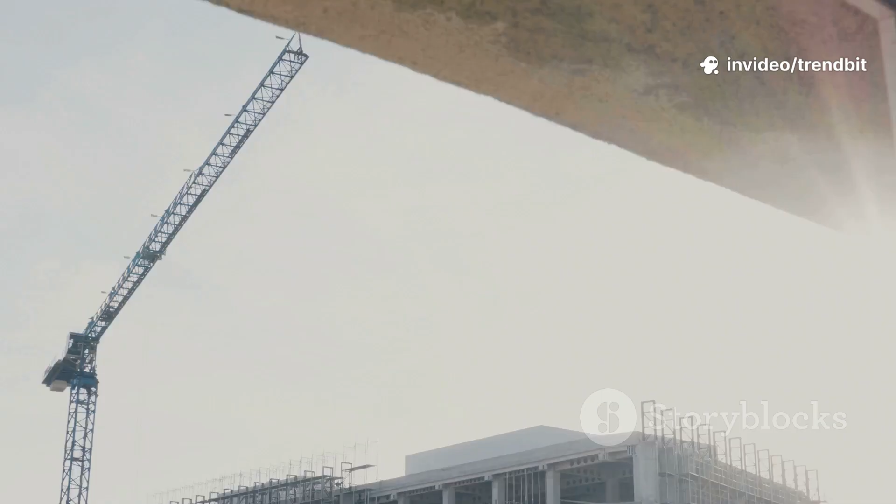The design was tested and approved, and construction went ahead. The building was completed in 1977, a proud addition to the Manhattan skyline. For a year, it stood without incident. Nobody knew that a simple change made during construction had turned its unique strength into a critical vulnerability, waiting for the right kind of wind to reveal its deadly secret.

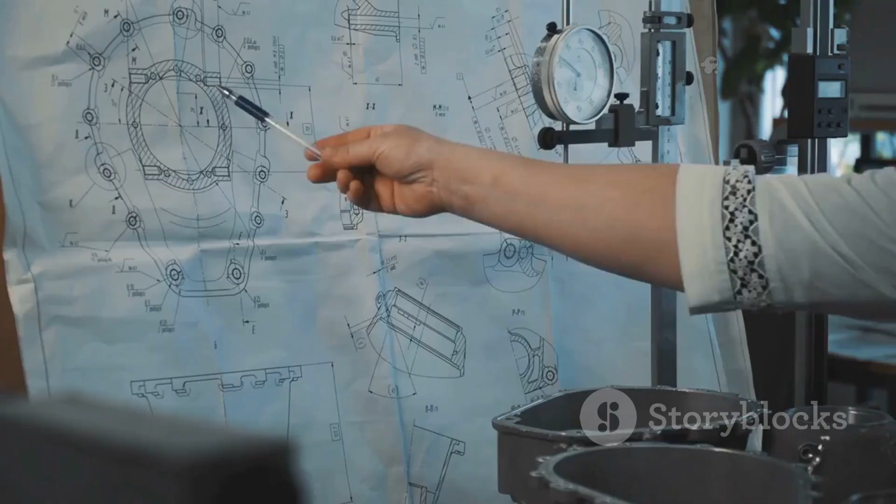This is a tale that reminds us that engineering is a human activity. Humans make mistakes. But what happens after a mistake is discovered is what truly matters. In this case, the chief structural engineer, a man named William LeMessurier, found the error himself. He was the one who designed the support system. He was the one who had to face the terrifying reality of his own miscalculation.

The weight of this knowledge must have been immense. He held the safety of thousands of people in his hands. His professional reputation, his career, and the lives of countless New Yorkers were all on the line, balanced precariously on a flawed connection deep within the tower's steel skeleton.

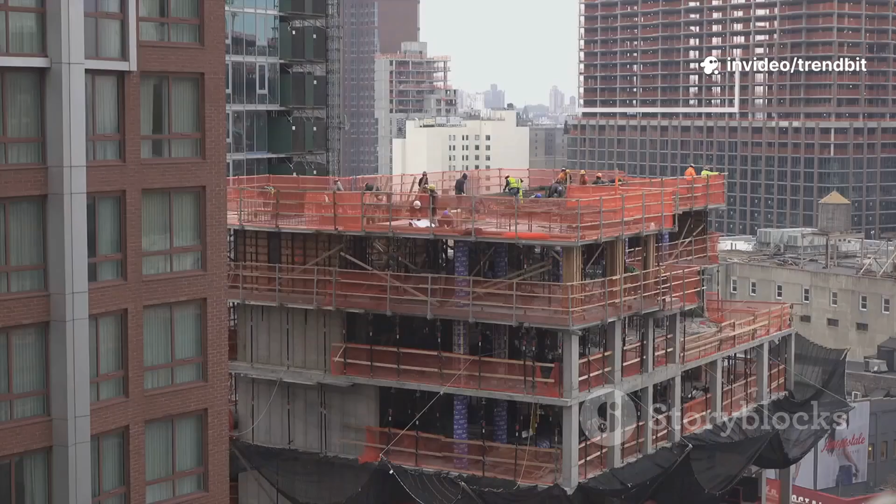The drama unfolded in secret, hidden from the public eye. While the city slept, a team of workers moved silently through the building's empty floors. They worked through the night, cutting into the structure and welding new steel plates to strengthen it. It was a clandestine operation, a heroic effort to correct a mistake before nature could exploit it.

The story of the Citicorp Center is a thriller set not in a spy movie, but in the world of blueprints, wind tunnels, and structural analysis. It serves as a powerful lesson about responsibility, ethics, and the courage to do the right thing, no matter the personal cost. It is a story of how disaster was quietly averted by one person's integrity.

The Citicorp Center was born from a unique challenge. A church, St. Peter's Lutheran Church, occupied a corner of the land where the tower was to be built. The church leaders agreed to sell the land, but with one important condition. They wanted a new church to be built in the same spot, as a separate and freestanding building. This meant the skyscraper could not have columns at its corners like a normal building.

The architects and engineers had to find a creative solution. They had to build a massive tower that seemed to float above the new church. This problem led to a design that was both revolutionary and visually stunning, capturing the imagination of the public and the architectural world alike.

The solution proposed by the engineering team, led by William LeMessurier, was daring. Instead of placing columns at the 4 corners, they decided to place 4 huge columns at the center of each side of the building. These massive stilts would lift the entire 59-story structure 9 stories into the air. This design choice created a large open plaza underneath the building and allowed the new St. Peter's Church to be constructed on its corner.

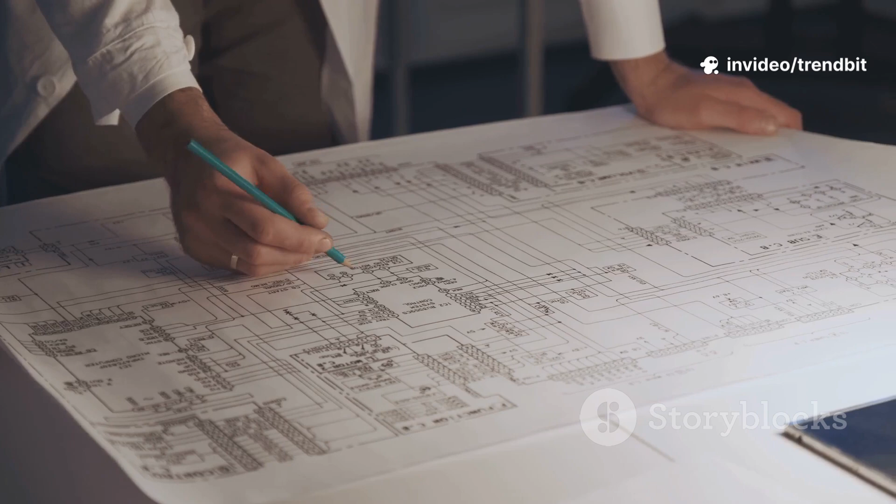To do this, the engineers designed a system of giant V-shaped braces, known as chevrons. These braces were stacked on top of each other, forming a visible pattern on the building's exterior. They acted like a giant skeleton, collecting the weight from each floor and channeling it downwards and inwards to the 4 massive columns. This system was not only functional, but also gave the building its distinctive look.

It was a design that was both honest and elegant, showing its structure on the outside. When the Citicorp Center was finished in 1977, it was celebrated for its innovation. It was a skyscraper that did more than just reach for the sky. It engaged with the city at street level. The open plaza became a new public space, and the building itself became an instant landmark.

The design was praised for its intelligence and beauty. It solved a complex problem with a solution that was both practical and artistic. No one suspected that the very same design that made the building famous also contained a hidden flaw. The building stood as a proud example of modern engineering, while its greatest weakness remained undiscovered, deep within its steel joints.

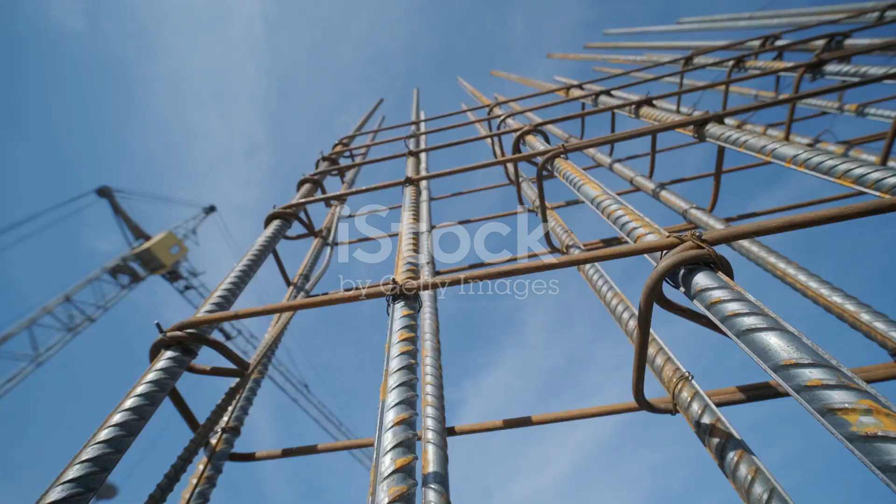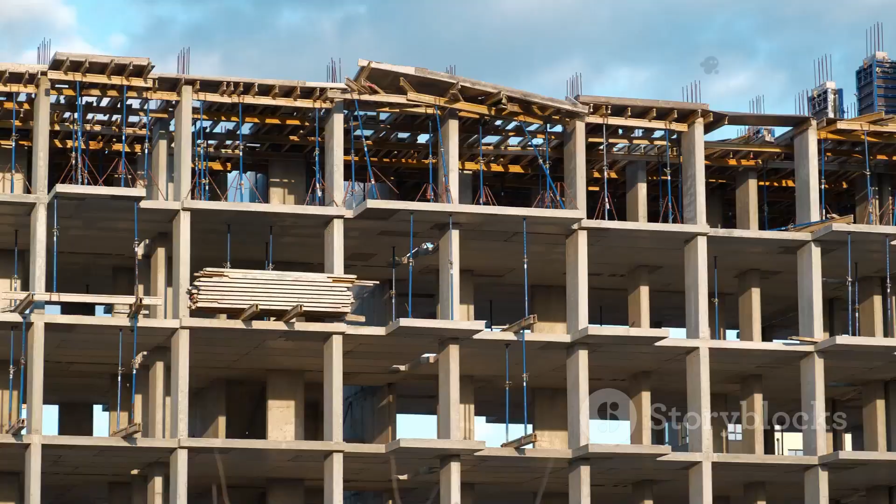The core of the Citicorp Center's structural integrity relied on a brilliant system of stacked V-shaped braces. These were not just decorative elements on the building's face, they were the primary load-bearing components. Imagine a giant hollow tube made of steel and glass. The chevron braces acted as the internal skeleton for this tube. Each V-shaped brace was designed to collect the immense weight from the floors above it.

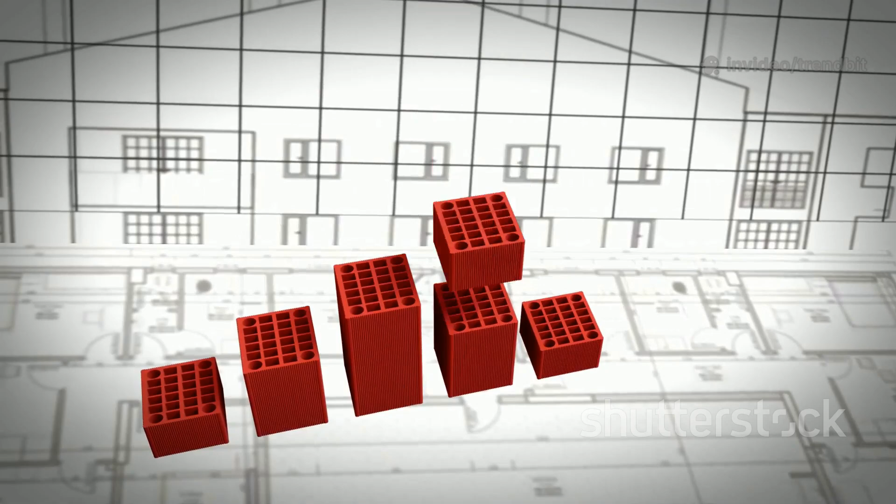They took these vertical forces and redirected them diagonally, channeling them towards the four massive columns that supported the entire structure. This was a clever way to move the building's weight from its perimeter to its center, a necessary step because of the columns' unusual placement. These braces were designed to handle the two main forces that act on any skyscraper: gravity and wind. Gravity constantly pulls the building downwards, and the chevron system was more than strong enough to handle this constant load.

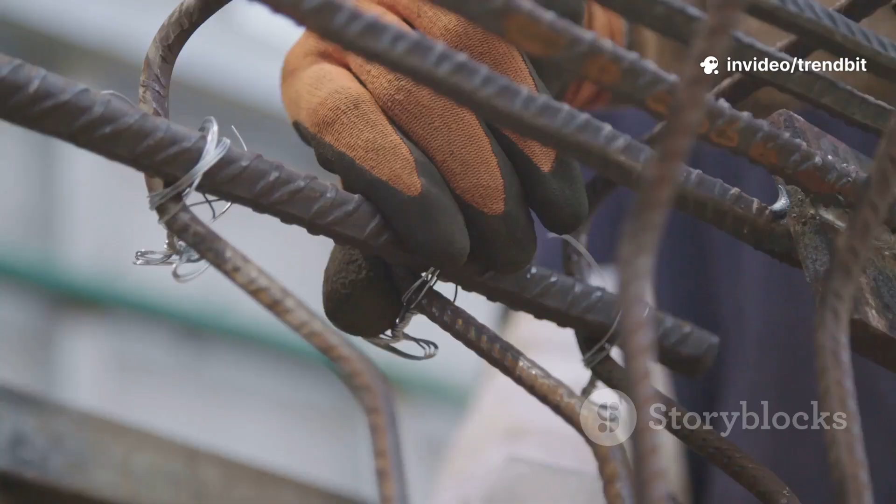The second force, wind, is more complex. Wind pushes against the side of a building, trying to make it sway or even topple over. The engineers designed the braces to act as a rigid frame against this push. When wind blew directly against one of the flat sides of the building, what engineers call a perpendicular wind, the braces on that side would be compressed, while the braces on the opposite side would be stretched. The system was designed to handle these forces efficiently.

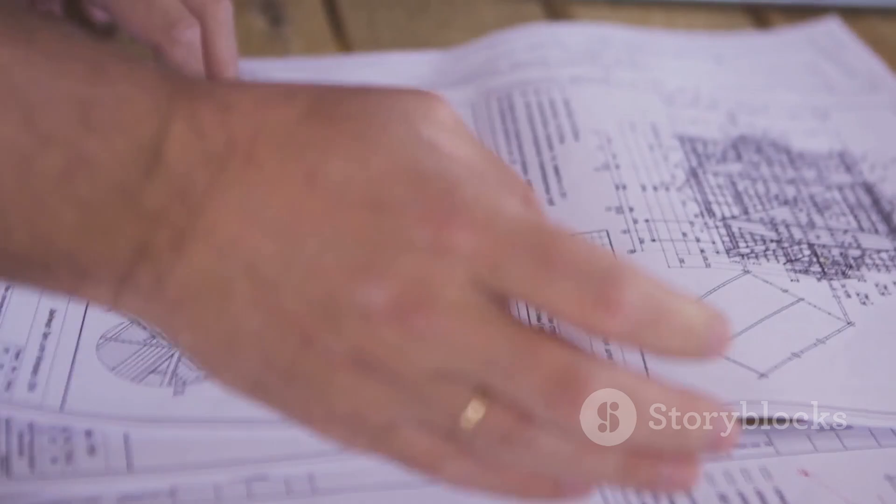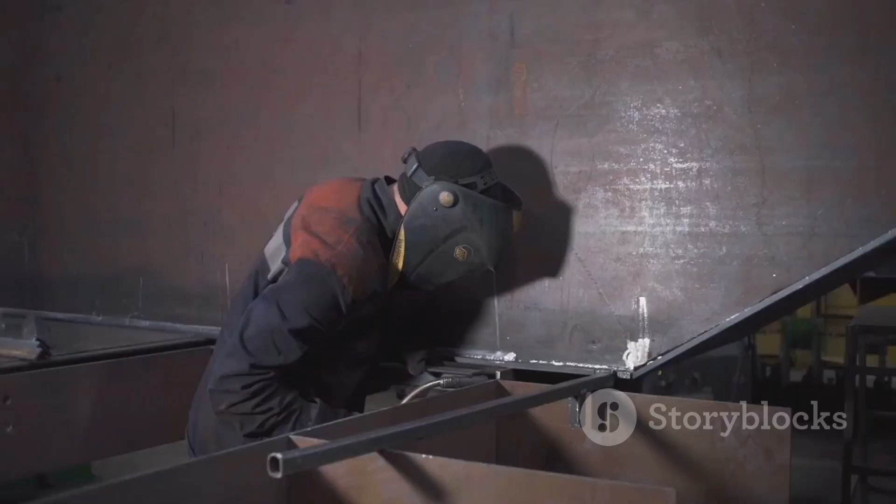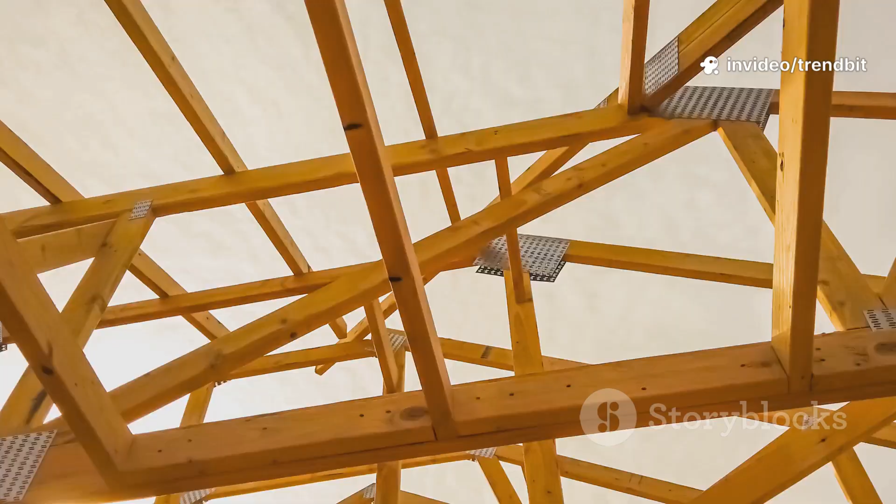During the design phase, the engineers calculated the strength needed for every part of the structure. They focused on how the braces would perform under the stress of these perpendicular winds, which were considered the most powerful force the building would have to face. For these connections, the engineers specified that the steel pieces should be welded together. Welded joints are incredibly strong and rigid, creating a single, solid piece of steel that can resist immense force. This was the standard and correct approach for designing a building to withstand the powerful gales that can sweep through a city like New York. The welded joints were meant to ensure the building would stand firm against hurricane-force winds.

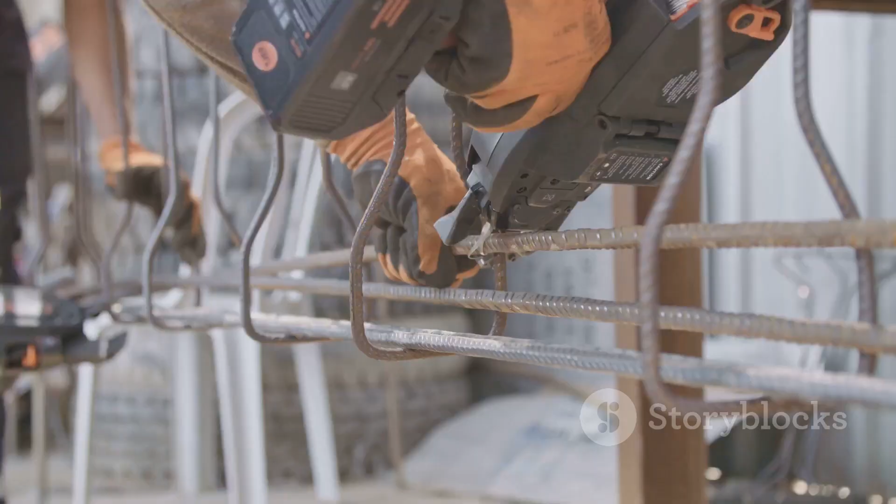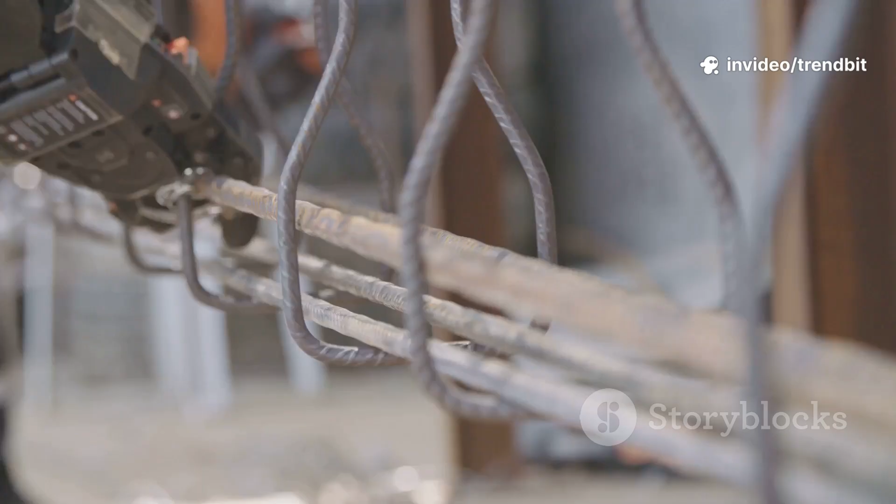However, a small but critical change was made during the construction process. The building contractor suggested that using high-strength bolted joints instead of welded joints for the chevron braces would be faster and cheaper. The engineering firm approved this change, believing that the bolted joints would be strong enough. This decision was based on the calculations for perpendicular winds. Bolts are very strong when a force pulls on them, but they are not as rigid as welds when the force comes from a different angle. This seemingly minor substitution, swapping welds for bolts, was the key to the problem. It created a hidden weakness that no one noticed until it was almost too late.

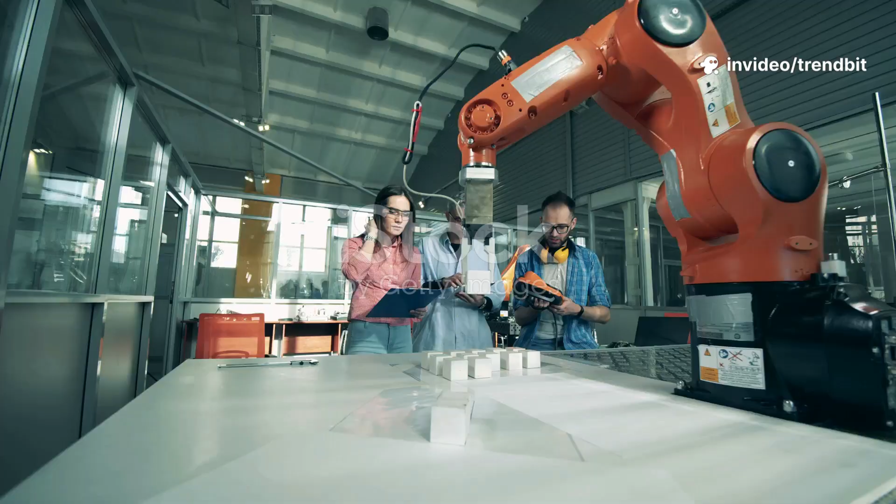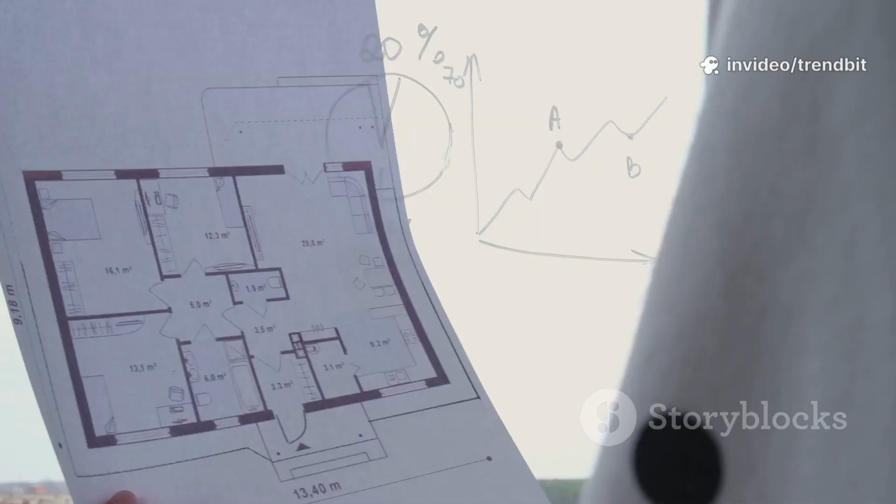The engineers had designed the Citicorp Center's support system to be strong against winds that hit the building's flat faces directly. This is the most common way to test a building's strength. Think of the wind pushing straight against a wall. The chevron braces were designed to transfer this force safely to the ground. The calculations showed that the bolted joints, which had replaced the original welded design, were strong enough for this kind of stress. Everyone involved in the project, from the engineers to the builders, believed the building was safe. They had followed the standard practices and building codes of the time, which focused primarily on these perpendicular wind forces.

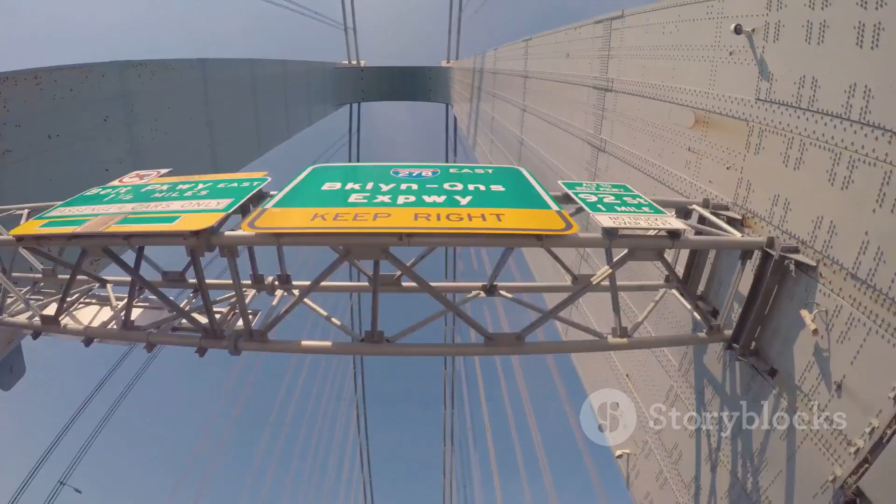The problem lay with a different kind of wind, one that the original calculations had overlooked. This was a quartering wind, a wind that strikes the building at a 45-degree angle, hitting two sides at once. When a wind hits a corner, its effect on the structure is very different. Instead of some braces being compressed and others being stretched, a quartering wind puts almost all the diagonal braces on all four sides of the building under tension simultaneously. This meant that the force on each individual joint was much higher than anyone had anticipated.

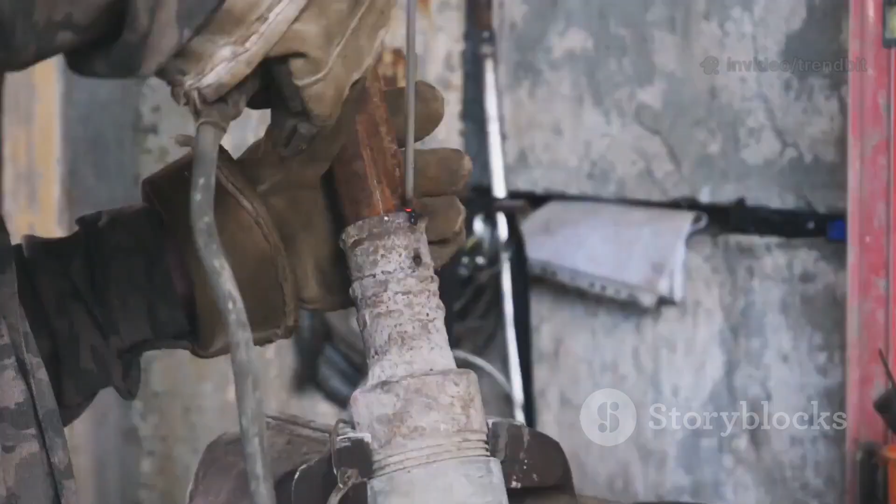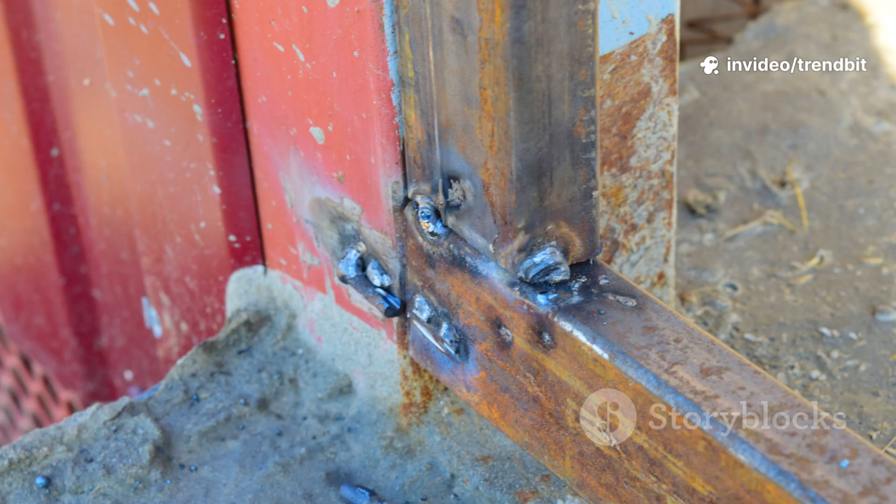The bolts in every single one of the 200 chevron joints were suddenly put under immense strain. This is where the change from welded joints to bolted joints became a critical flaw. Welded joints fuse the steel plates together, making them act as one solid piece. They are incredibly strong under all kinds of forces.

Bolted joints, however, are different. They work by clamping steel plates together. While they are strong when pulled directly apart, they are much weaker when the force tries to shear them or pull them in multiple directions at once. The quartering winds created exactly this kind of complex stress on the bolts.

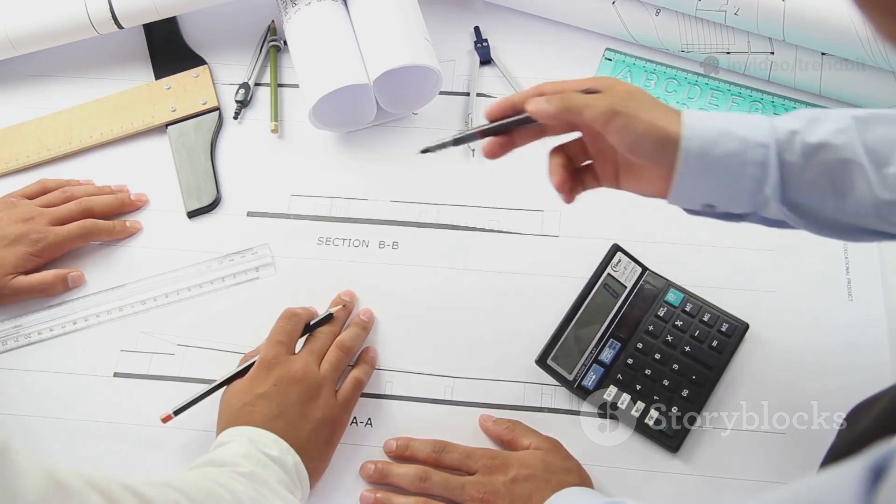The force on the bolts was increased by 40% under these specific wind conditions. This was a massive increase that the original design did not account for. Even more alarmingly, the structure was now significantly more vulnerable to strong storms. The original design, with welded joints, was strong enough to withstand what engineers call a 100-year storm, a storm so severe it is only expected to happen once a century.

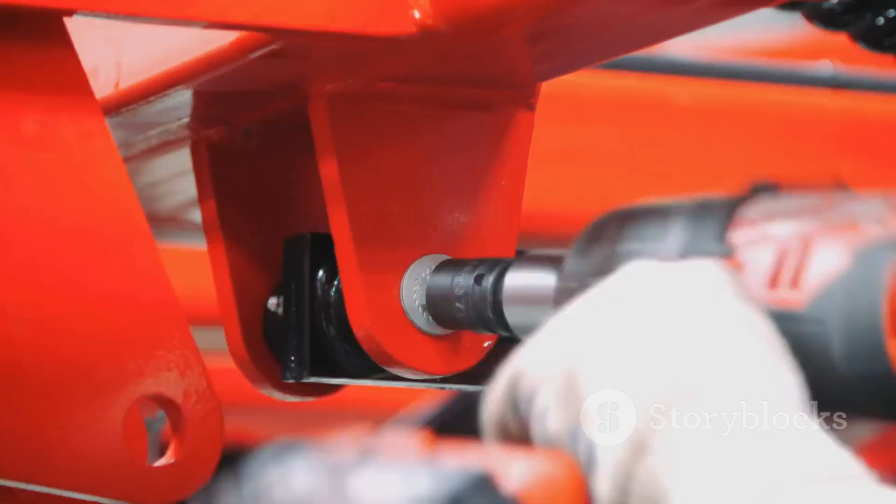But with the weaker bolted joints, the analysis showed a terrifying new reality. A storm that was statistically likely to happen every 16 years would be strong enough to cause the bolts on some joints to fail. If these bolts failed, the load would shift to other joints, causing them to fail in a chain reaction. The entire skyscraper could collapse in a matter of hours, a catastrophic failure triggered by a specific type of wind.

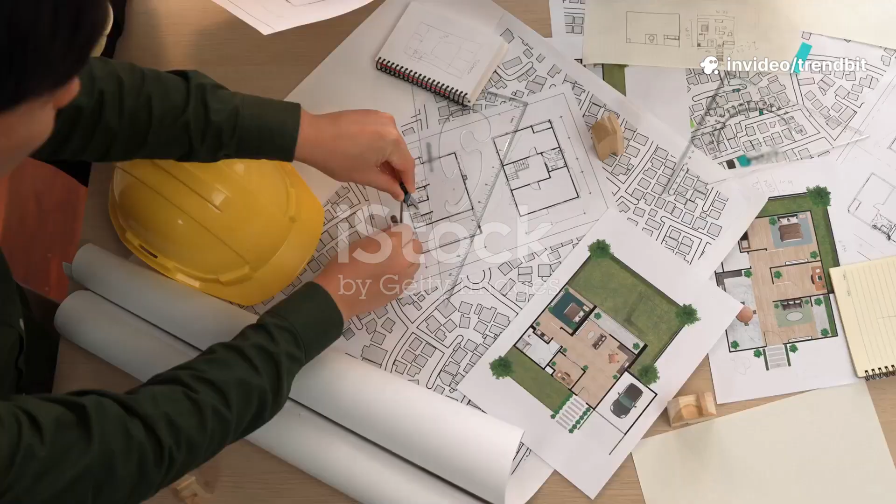The discovery of this terrible flaw did not come from a senior engineer or a building inspector. It began with a simple question from an undergraduate architecture student. In 1978, a year after the building was completed, a student from New Jersey named Diane Hartley was writing her thesis on the Citicorp Center.

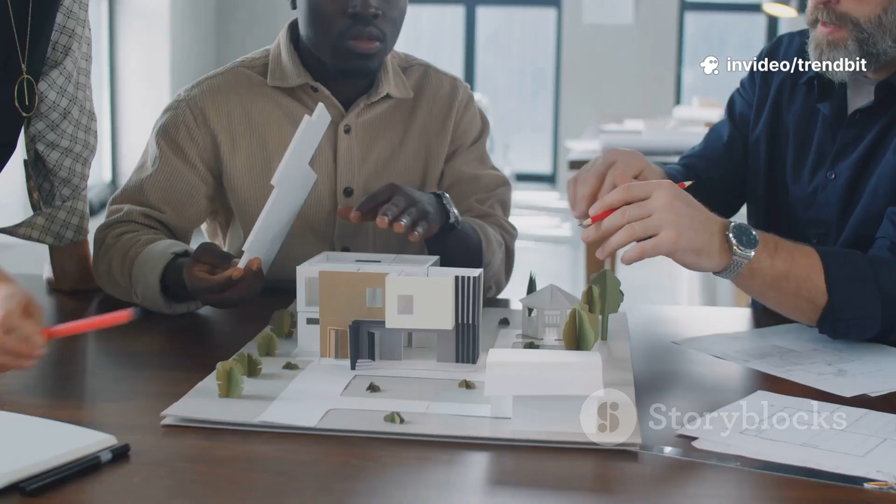As part of her research, she called William LeMessurier's office with some technical questions about the design. She had been told by one of her professors that the columns were unusually placed in the center of the building's sides, not at the corners. She wanted to understand how the building handled wind loads, and she specifically asked about the forces from quartering winds.

LeMessurier was not in the office that day, but a junior engineer answered her questions based on the official design documents. The student was persistent. She followed up, and her questions were eventually passed on to LeMessurier himself. LeMessurier, confident in his design, patiently explained that the building was perfectly safe. He described how the structure was designed to handle perpendicular winds, the strongest forces it was expected to face.

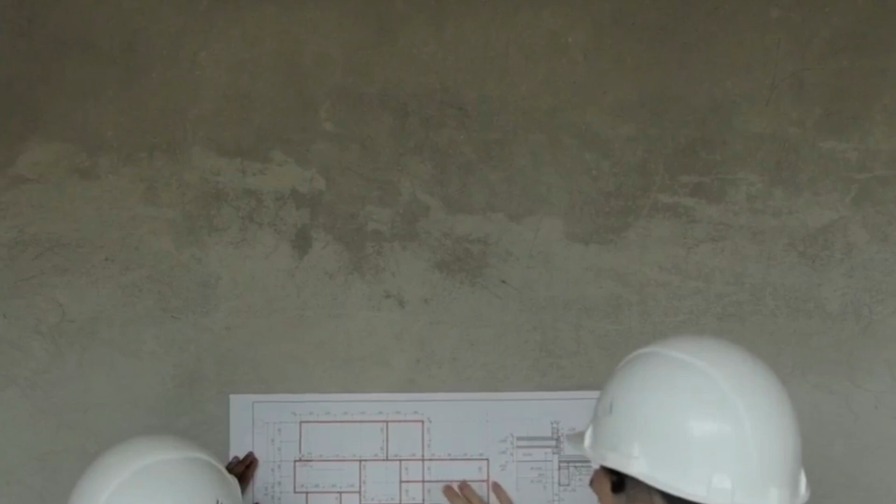He assured her that his team had done all the necessary calculations and that the building was sound. He likely thought of it as a routine inquiry, a simple chance to educate a curious student about his celebrated work. However, the student's question about quartering winds stuck in LeMessurier's mind. He had not personally analyzed the effect of these diagonal winds on the bolted joints. The building codes at the time did not require it.

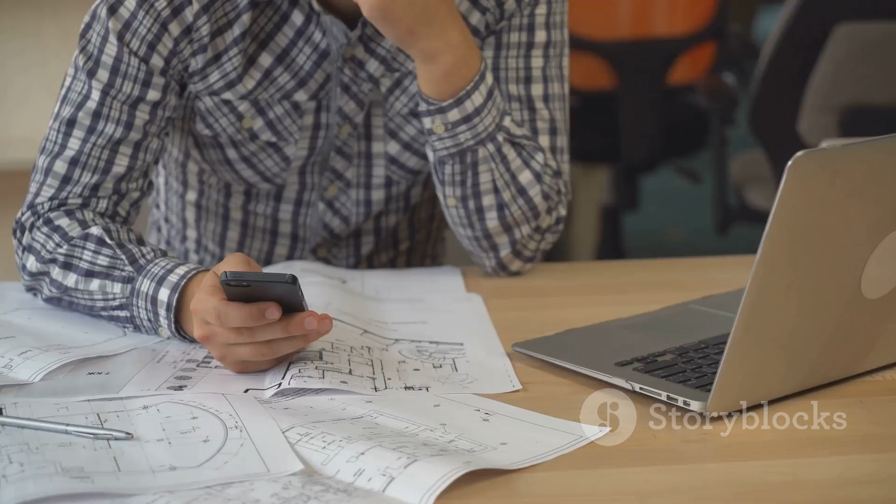But driven by a sense of professional curiosity and responsibility, he decided to double-check the calculations himself. He went back to his office and ran the numbers, this time specifically modeling the stress on the bolted joints from a 45-degree wind. He wanted to prove to himself that the student's concern was unfounded and that his design was as robust as he believed it to be. It was a decision that would change everything.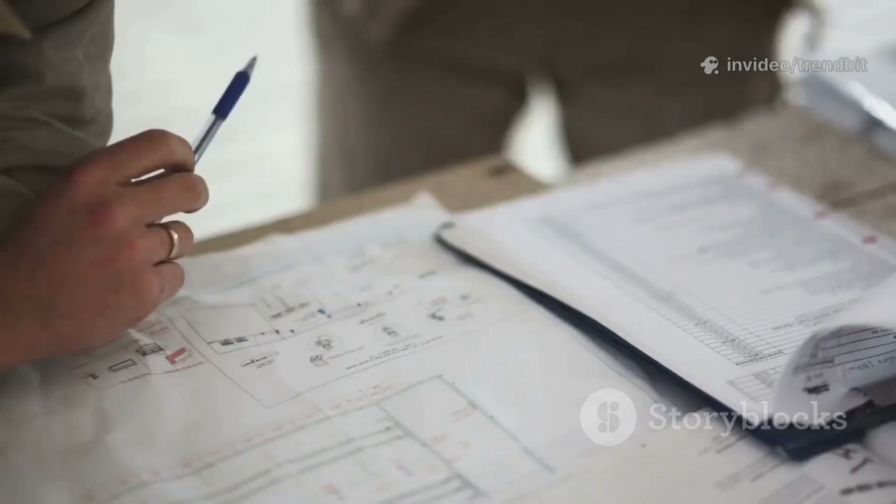As he worked through the complex equations, a feeling of dread began to grow. The numbers on the page told a horrifying story. The student was right to be concerned. The quartering winds put a much greater strain on the bolted joints than anyone had realized, a 40% increase in stress. Then, LeMessurier remembered another critical detail.

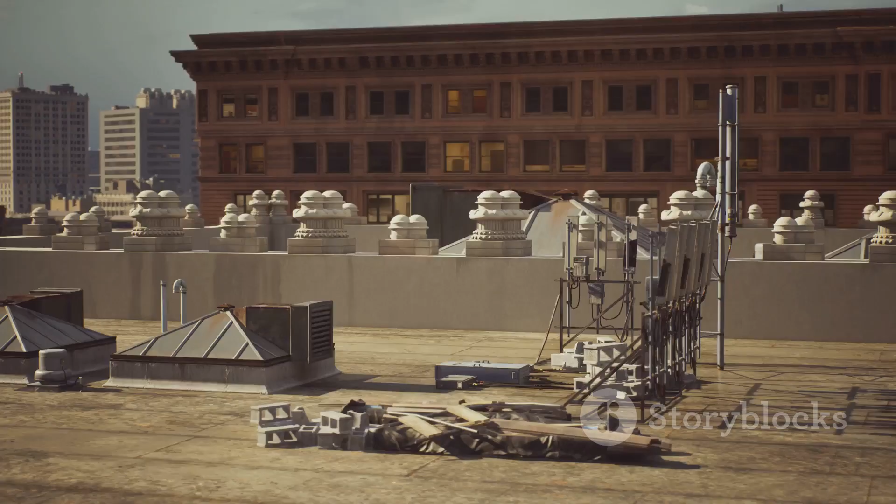The building also had a tuned mass damper, a 400-ton block of concrete on the roof designed to reduce the building's sway. This device needed electricity to work. In a hurricane, the power would likely fail, rendering the damper useless. This would increase the stress on the joints by another 40%. The combined effect was a potential 160% overload on the bolts. The building was dangerously unsafe.

William LeMessurier was now faced with a reality far worse than any engineer's nightmare. His calculations were undeniable. His celebrated skyscraper, a landmark on the New York City skyline, was a ticking time bomb. According to his analysis, a storm with wind speeds of just 70 miles per hour, if it hit the building at the right angle, could start a catastrophic failure.

Such a storm was not a rare 1,000-year event. It was a storm that had a statistical probability of hitting New York City once every 16 years. The city was currently in the middle of hurricane season. The risk was not theoretical or distant.

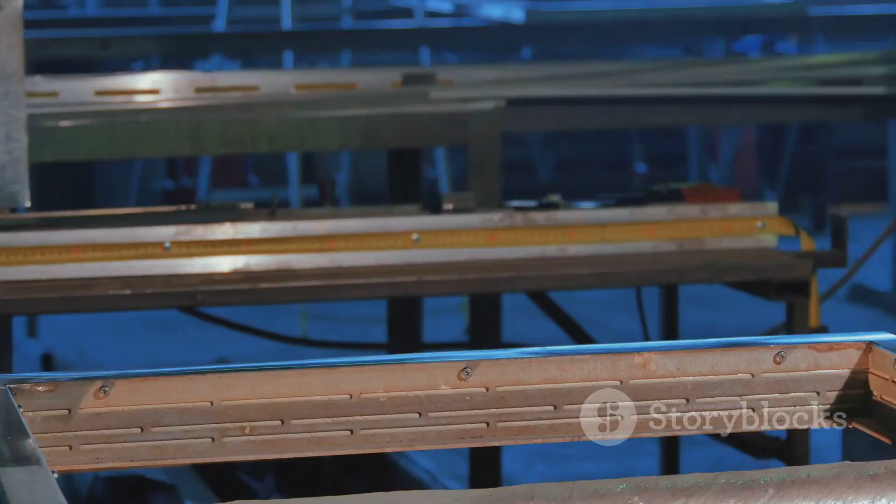It was immediate and terrifyingly real. The weight of this discovery was immense. LeMessurier had to confront his own mistake. He had approved the switch from welded joints to bolted joints, a decision made to save time and money. He had not considered the effects of quartering winds on these bolts. Now the lives of thousands of people in the building and the surrounding city blocks rested on his shoulders.

He had several options. He could keep quiet and hope that a severe storm would never hit. Revealing the flaw would surely ruin his career, destroy his reputation, and expose his firm to massive lawsuits. The temptation to hide the problem must have been enormous. Instead of hiding, LeMessurier chose the path of professional integrity and moral courage. He knew he could not live with the risk, no matter how small the chance of it happening seemed.

He had a duty to protect the public, an ethical obligation that is at the very core of the engineering profession. He contacted his insurance company to inform them of the potential for a massive claim. Then, he prepared a detailed report of his findings. He knew he had to inform the building's owner, Citicorp, and the city authorities. He was about to admit to a mistake that could have unimaginable consequences, both for the city and for himself.

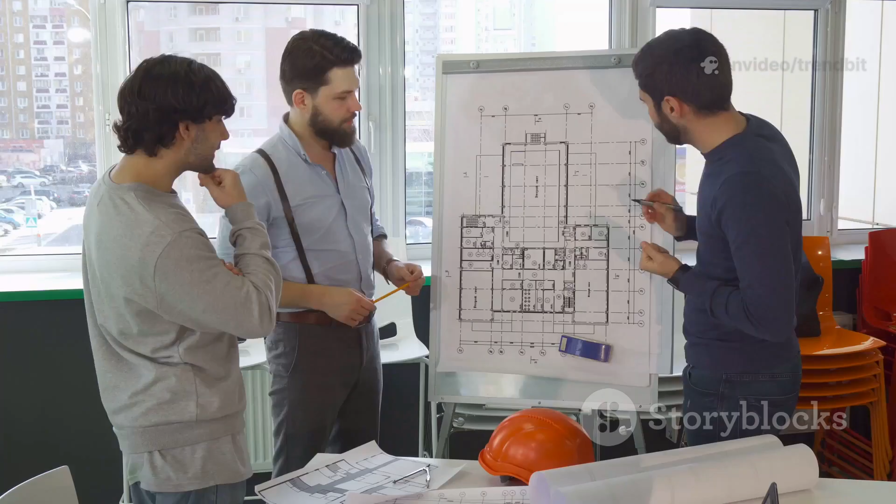He flew to New York to meet with the executives at Citicorp. In a calm and professional manner, he laid out the facts. He explained the nature of the flaw, the precise level of risk, and the conditions that could lead to a disaster. He did not make excuses or try to shift the blame. He presented the problem clearly and also came prepared with a solution.

He had already designed a repair plan, a way to strengthen the 200 bolted joints by welding heavy steel plates over them. He took full responsibility for the error and outlined a clear path to make the building safe. It was an act of incredible professional bravery.

With Citicorp's leadership and city officials now aware of the danger, a plan was immediately put into action. The most critical challenge was to carry out the repairs without causing a public panic. If news of the building's instability leaked out, it could create chaos in one of the world's busiest cities. The decision was made to perform the work in absolute secrecy.

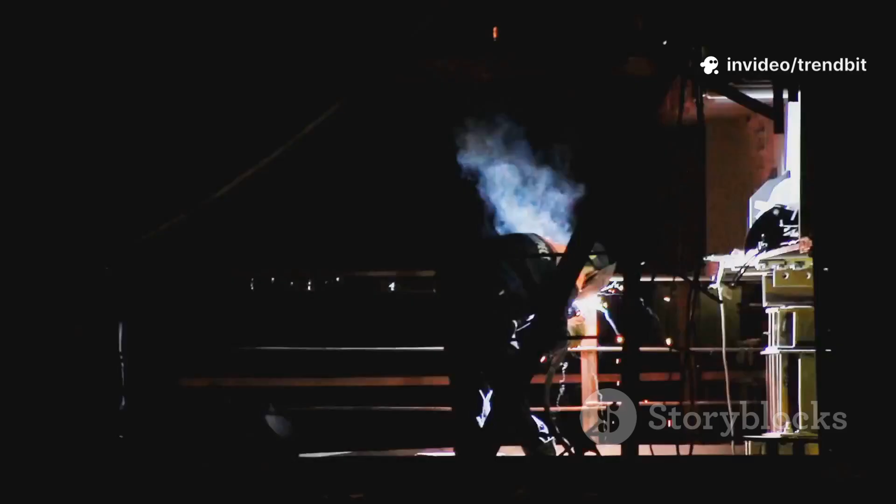A team of welders was assembled, and a cover story was created. The public was told that routine maintenance and inspection work was being done on the building's structural system. This allowed the workers and materials to move in and out of the building without raising suspicion. The repair operation was a race against the clock and the weather. It was the height of the Atlantic hurricane season, and every day brought the risk of a storm.

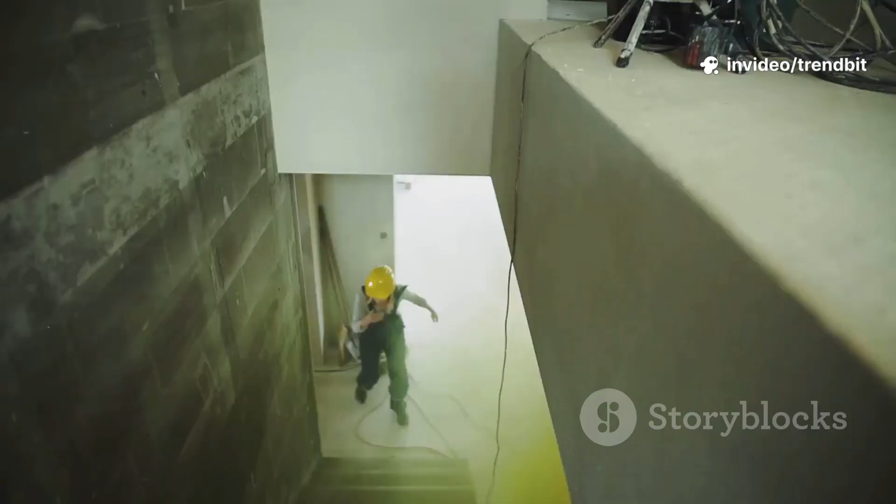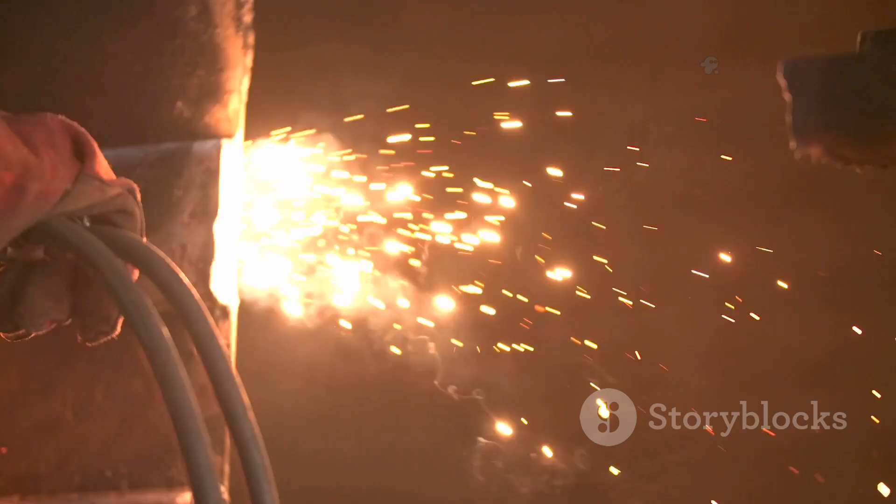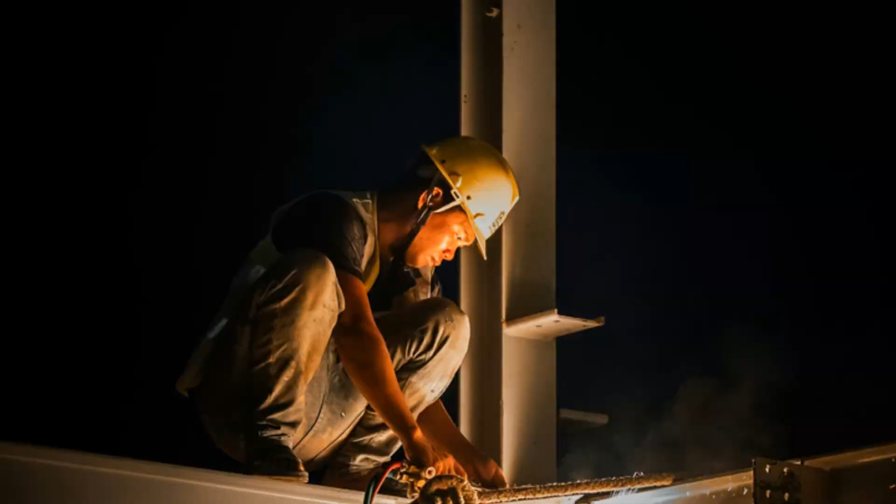The work could only be done at night, after the thousands of office workers had gone home. From 8 p.m. to 4 a.m., the welders would move into the empty office spaces. They would remove sections of the walls to access the steel skeleton underneath. Then, they would carefully weld 2-inch thick steel plates over each of the 200 bolted joints, reinforcing them to withstand the forces they were never designed to handle. It was difficult, noisy, and dangerous work carried out in the dead of night.

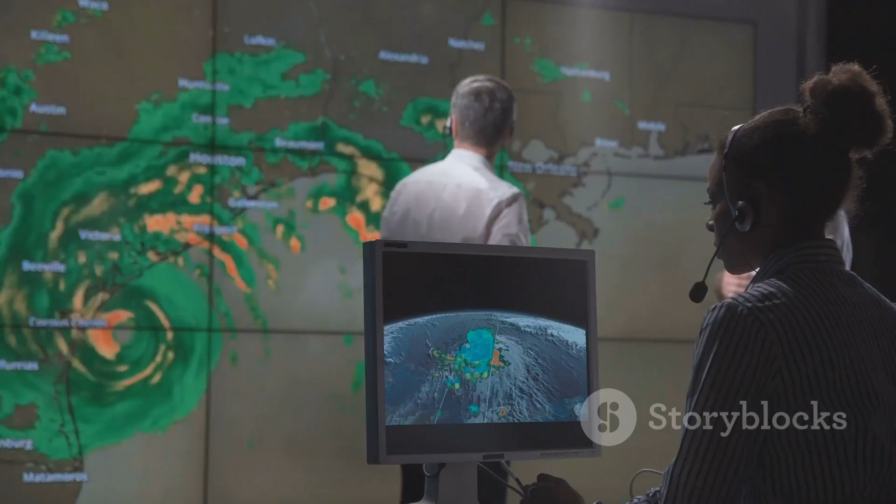The logistics of the operation were incredibly complex. LeMessurier and a team of engineers stayed on site, overseeing every step of the process. They worked with meteorologists who provided constant weather updates, giving them a 5-day forecast for the Atlantic.

A detailed emergency evacuation plan was created in secret. This plan, developed with the Red Cross and local police, would be triggered if a hurricane was forecast to head towards New York. It involved evacuating the Citicorp Center and a 10-block radius around it, a massive undertaking that everyone hoped they would never have to execute. The tension was palpable as the team worked through the summer nights, strengthening the building one joint at a time.

For weeks, the secret drama played out high above the sleeping city. During the day, the building operated as usual. Office workers typed at their desks, made phone calls, and held meetings, completely unaware of the frantic life-or-death repairs that had taken place just hours before.

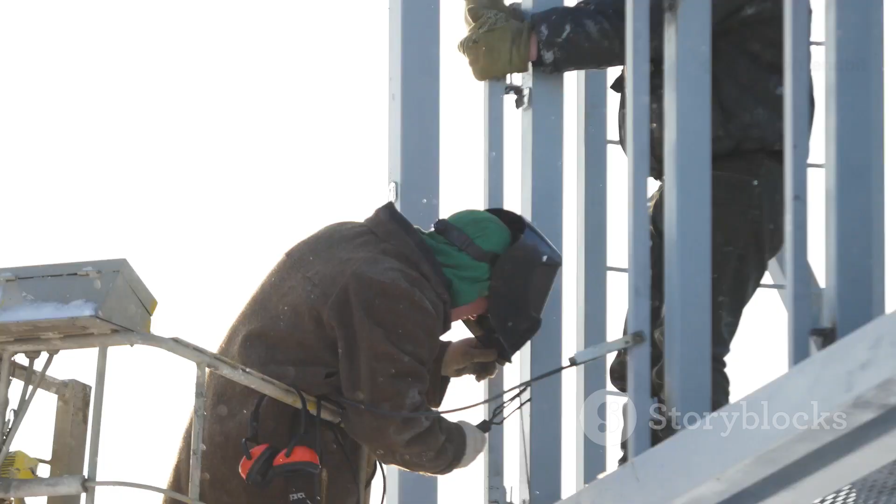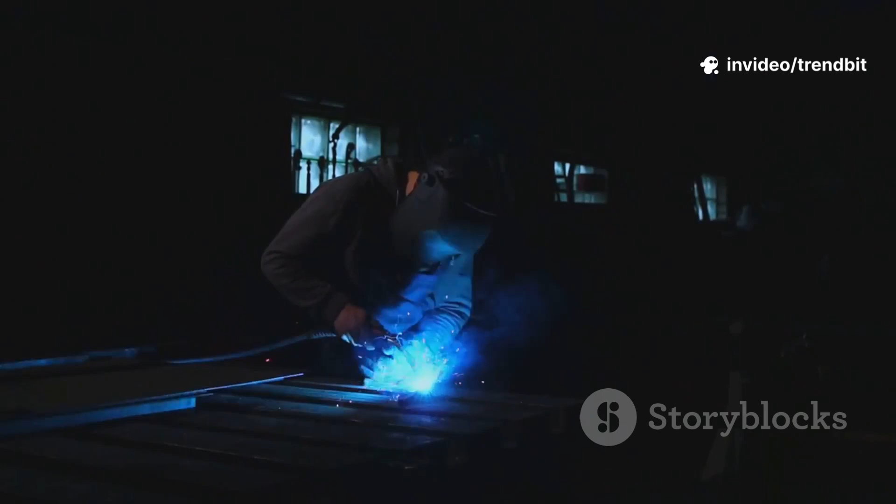The welders and engineers worked tirelessly, their progress hidden behind temporary walls. They were slowly but surely turning a critically flawed structure into a safe one. The secrecy held, the public remained unaware, and the steel plates were welded one by one, each spark in the night a small victory against a potential disaster.

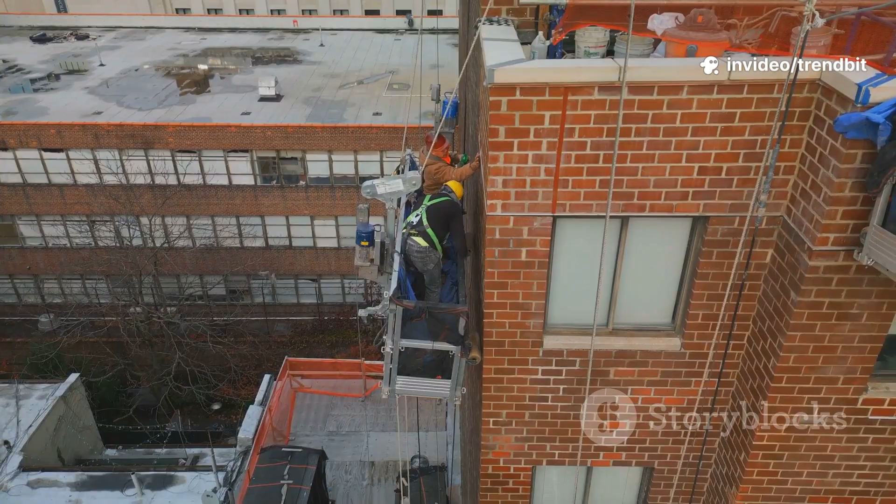As the secret repair work continued through August and into September of 1978, the team on the ground kept a constant, anxious watch on the weather. The greatest fear was a major hurricane moving up the East Coast and setting its sights on New York City. Halfway through the repairs, that fear almost became a reality.

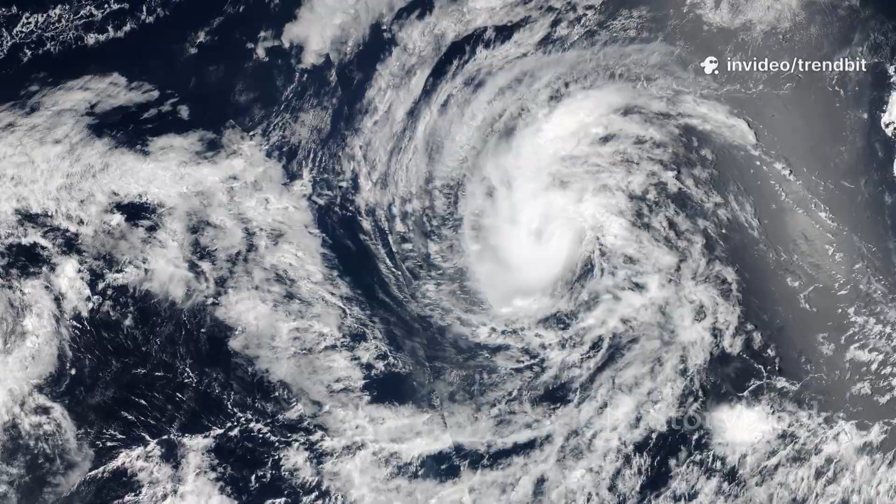A powerful storm, Hurricane Ella, formed in the Atlantic and began to track westward. For several days it grew in strength and moved on a path that could bring it directly to the city. For LeMessurier and the others involved in the secret operation, this was the moment they had been dreading. The atmosphere inside the emergency command center became incredibly tense.

Meteorologists were providing hourly updates on the hurricane's position and predicted path. The evacuation plan for the 10-block area around Citicorp Center was ready to be activated. LeMessurier was on the phone with officials, preparing to make the call that would trigger a massive and unprecedented evacuation of a part of Manhattan.

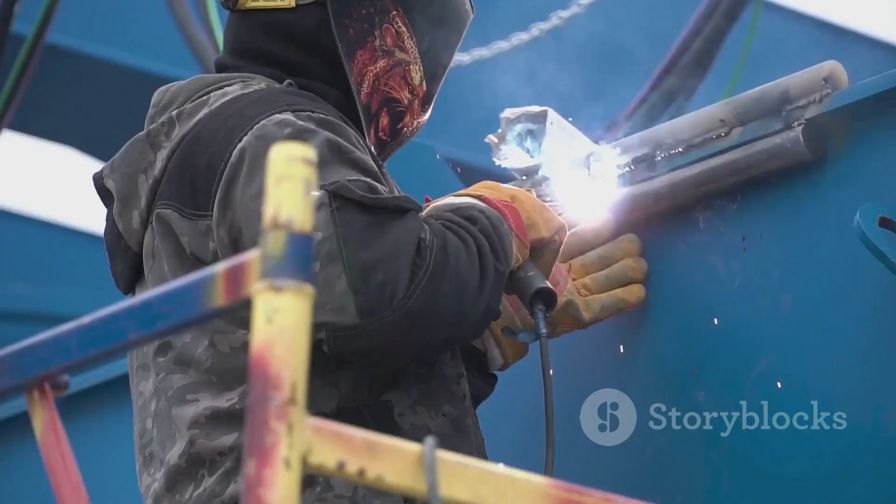The fate of the building and the safety of the surrounding neighborhood hung in the balance, dependent on the unpredictable path of a swirling storm. The welders worked faster, knowing that their time might be running out. Then, just as it seemed a catastrophe was unavoidable, fate intervened.

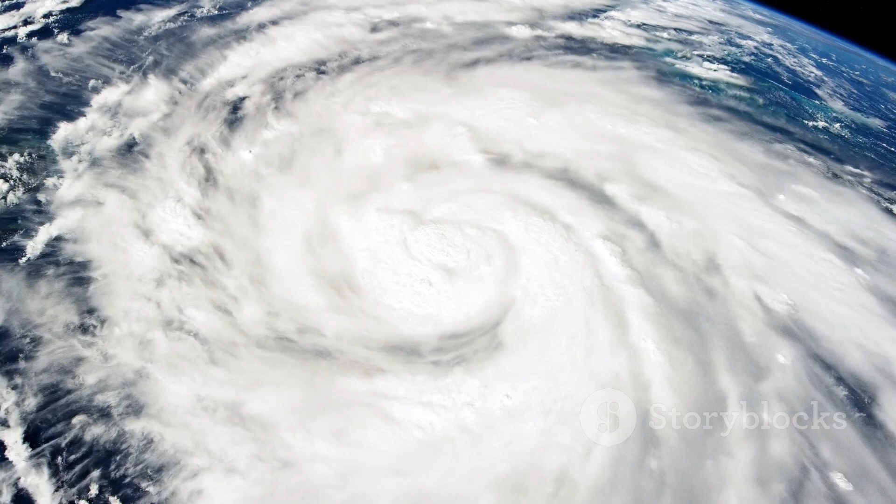As Hurricane Ella approached the coast, it suddenly and unexpectedly changed course. It turned northward and veered out into the open Atlantic Ocean, away from land. The storm that had threatened to expose the building's fatal flaw and cause a disaster of unimaginable proportions dissipated harmlessly at sea. A collective sigh of relief went through the small group of people who knew the secret.

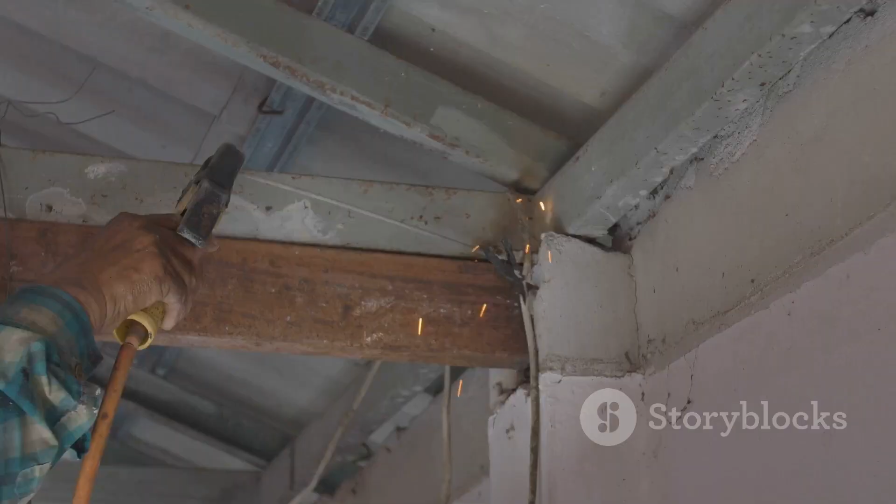They had been spared. The hurricane that never came gave them the precious time they needed to finish the repairs and secure the building. By the end of September, the work was complete. All 200 bolted joints had been reinforced with heavy welded steel plates. The skyscraper's skeleton was now stronger than it had ever been, even stronger than in the original design. The secret had been kept, a panic had been averted, and the building was finally safe.

The crisis was over. The story of the near disaster remained a closely guarded secret among the handful of engineers, executives, and city officials who had lived through it. For nearly 2 decades, the public would remain completely unaware of how close New York City had come to a major tragedy.

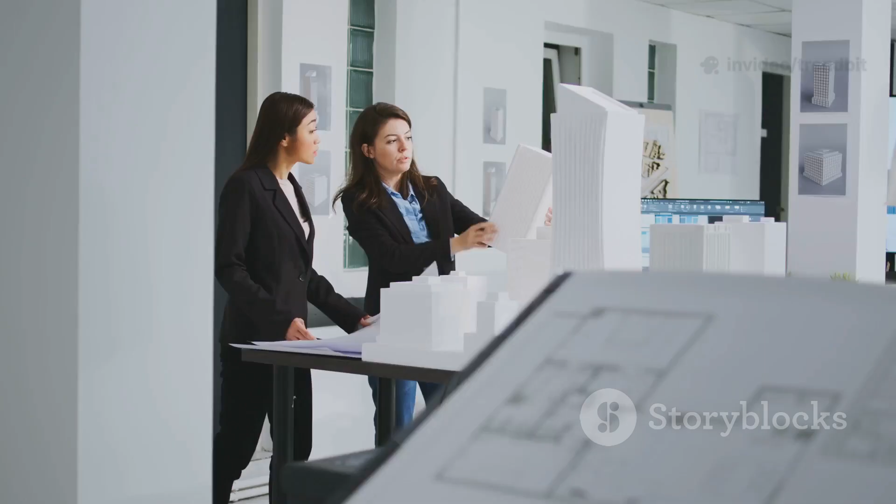The story of the Citicorp Center crisis was finally made public in a 1995 article in the New Yorker magazine. It revealed to the world the incredible drama that had unfolded in secret 17 years earlier. Instead of facing ruin and disgrace, William LeMessurier was hailed as a hero. His actions became a celebrated case study in engineering ethics, taught in universities around the world.

He demonstrated that the highest duty of an engineer is to protect the public's safety, even if it means admitting to a serious personal mistake. His courage to speak up, take responsibility, and act decisively saved countless lives and prevented a devastating disaster. The Citicorp Center affair provides several powerful lessons.

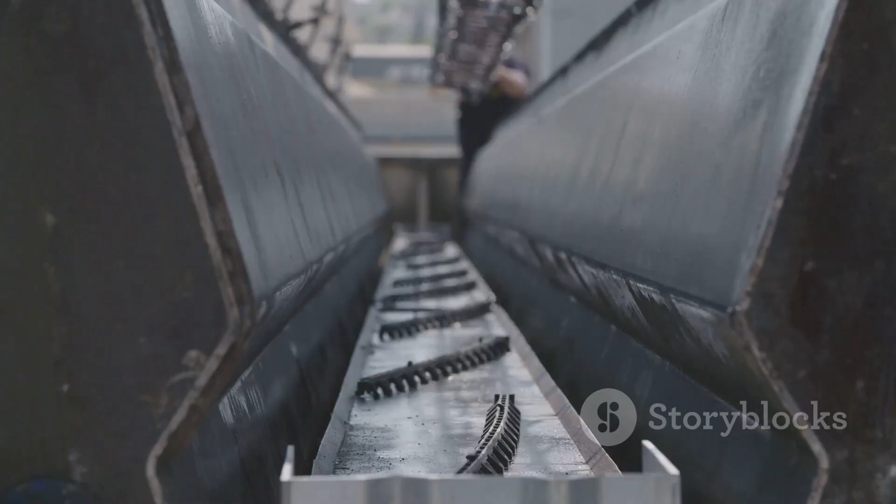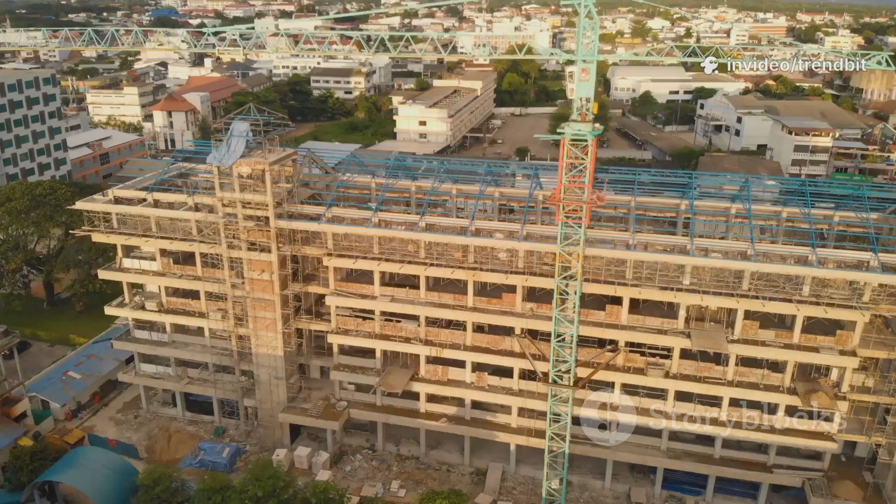First, it highlights the importance of thoroughness in engineering design. The initial flaw was created by overlooking the effect of quartering winds and by approving a seemingly minor change in construction materials without fully re-evaluating the entire system. It shows that even small changes can have large, unforeseen consequences.

It underscores the need for engineers to question assumptions, check every detail, and consider all possibilities, not just the ones required by the building codes of the day. The codes, after all, represent the minimum standard for safety, not the highest. Furthermore, the story is a profound example of ethical responsibility.

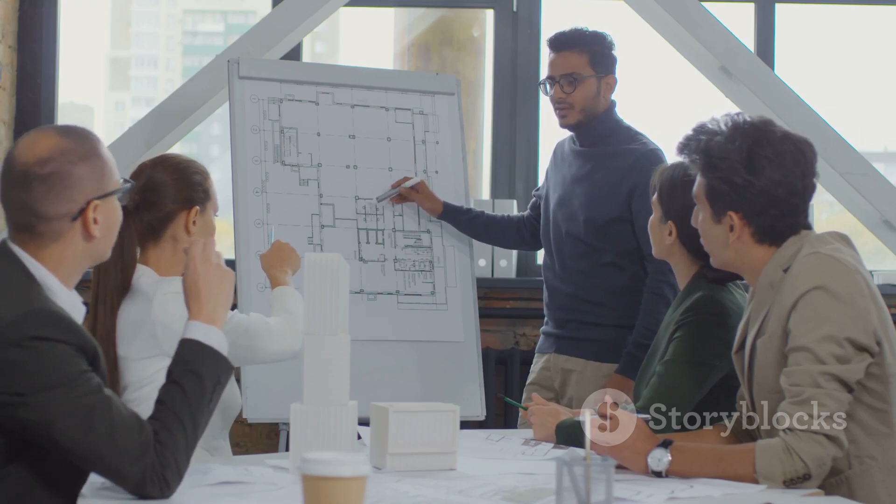When faced with a terrible choice between protecting his reputation and protecting the public, LeMessurier chose the public. He did not hide his mistake or hope for the best. He confronted the problem head-on, with honesty and integrity. This moral courage is perhaps the most important quality an engineer can possess.

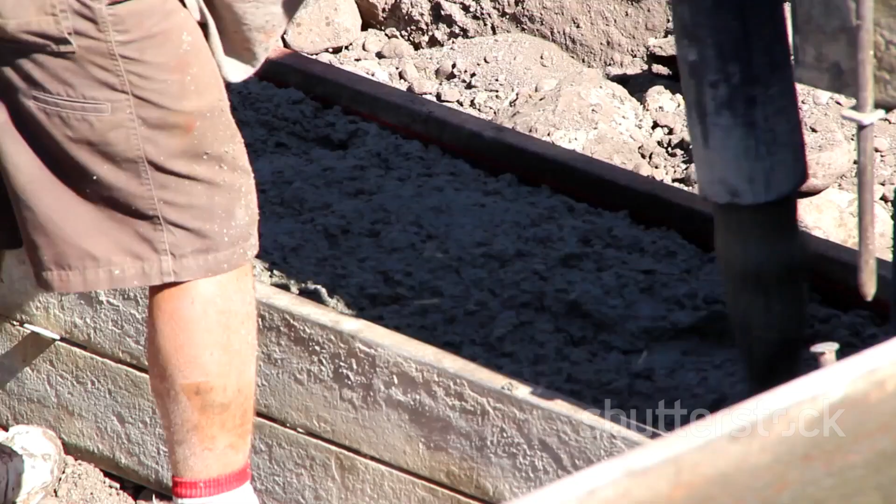Structures of steel and concrete are ultimately built on a foundation of trust. People trust that engineers have done their work correctly and diligently. LeMessurier's actions reinforced that trust by showing what it means to be truly accountable. Today, the Citicorp Center, now known as the Citigroup Center, still stands tall and proud in the Manhattan skyline.

It is one of the safest buildings in the world, its structure made robust by the secret repairs performed so long ago. But its true legacy is not just in its physical strength, but in the story it represents. It is a permanent reminder that engineering is a human endeavor, and with that comes the possibility of error. More importantly, it is a testament to the fact that integrity, honesty, and the courage to do the right thing are the most critical components in any great structure. It is a lesson written not just in textbooks, but in the steel heart of a skyscraper.